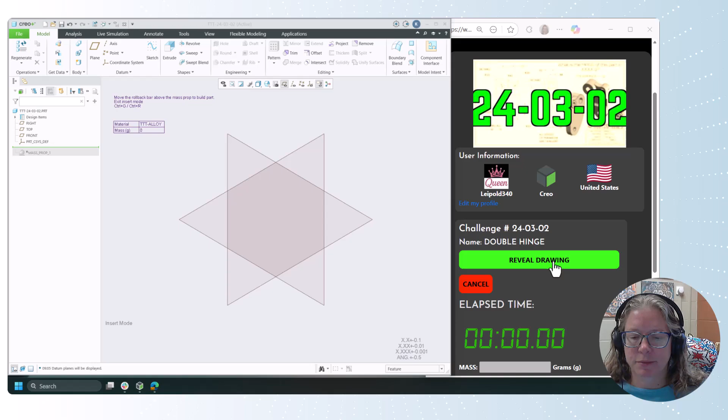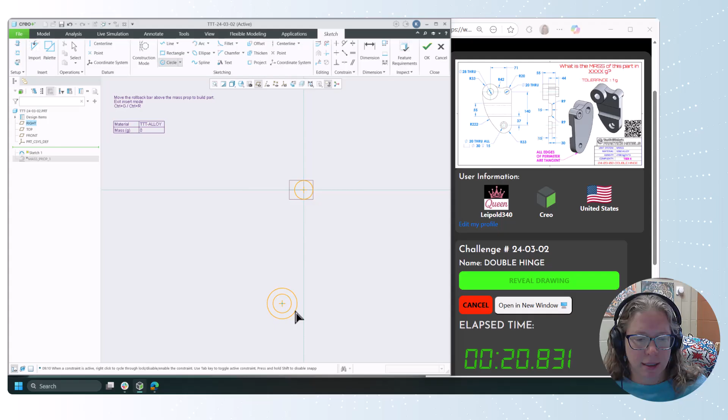So here we go. We're going to make a sketch on the front plane and try to capture a lot of this information in here. We're going to do a circle. Sometimes I like to double click and type in a new value and just kind of rescale the whole thing before I go too much further. The hole down here is also 20 on the inside, so we can do that. And then add a few other circles for the counterbore and the radius.

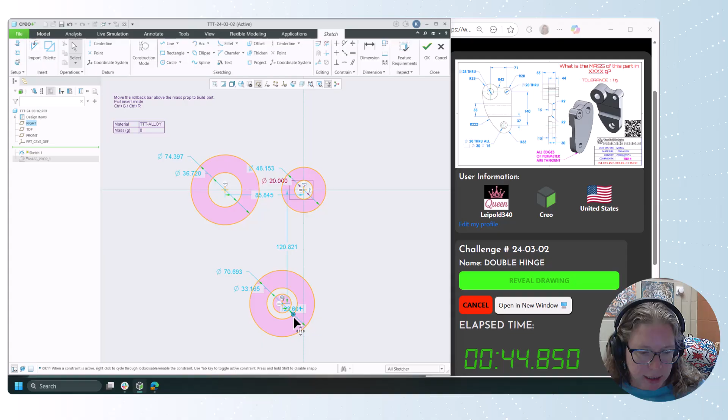We'll add one over here for the radius. We'll add one straight over, but I don't want this one to be the same size. So if I hold down Shift, it gets rid of those equal size constraints so I can place it individually. Okay. All right, so let's see here. I know this one's going to be 140.

We've got the inside diameter 20, which is up here. Let's start up at the top. Let's make that a radius of 20. Let's make the inside diameter over here 28 and the outside a radius of 33. There we go. The distance between those two is going to be 71. Okay. All right, so we got the distance.

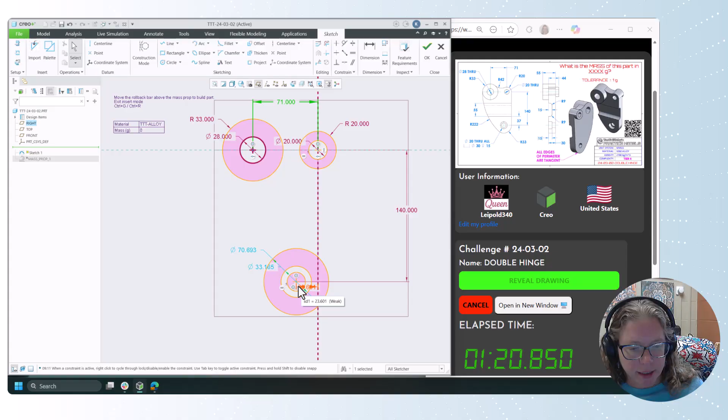Center is 20, its counterbore is 30, and the radius out there, oh, I guess I could have made those the same. Oh well, it's 33. All right, we're going to add a line that's coming down vertically from the top hole. Right, and then let's make this tangent.

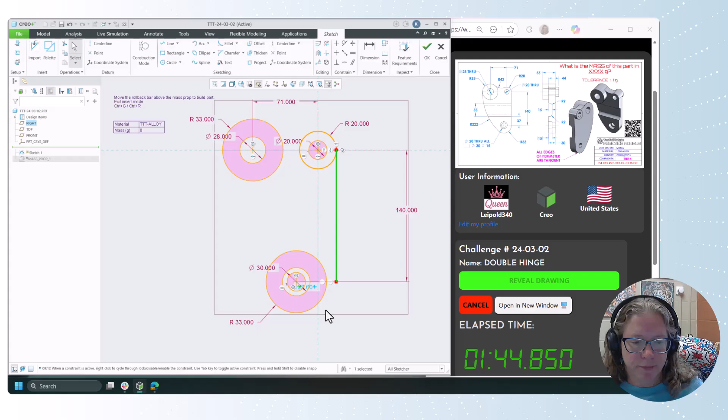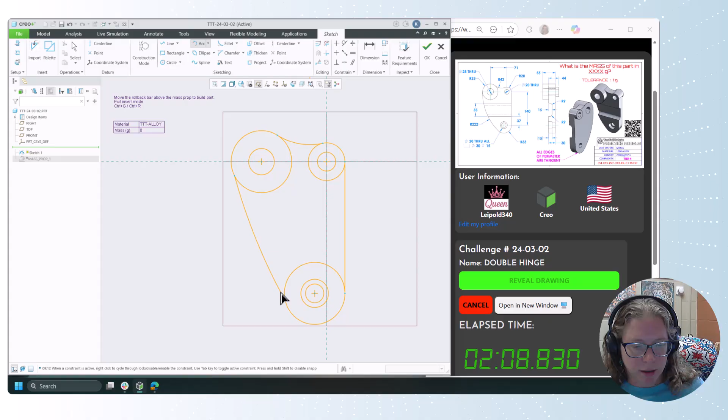Okay. Next, we got two arcs that are tangent arcs, so we can start here and end here, and I want it to be tangent. We can get one of them, we can't get both of them, but I can hold down Control, get both of them, and make them tangent right there. Same thing here. I'm going to make a tangent arc. I want one of those tangent constraints, but I can hold Control and get the second one.

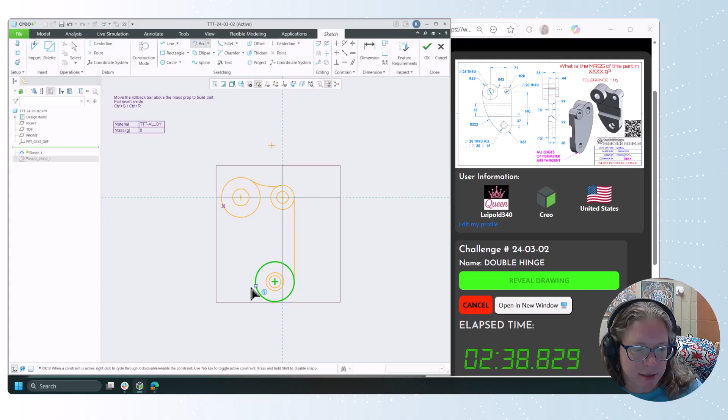All right, this radius is 222. Oh, and it's going the wrong way. Hold on. I might have an issue with that. I don't know if it'll let me force it the other direction. Yep. So let's get rid of that arc and try that one again. So my mistake there, we're going to make this arc on the outside tangent. There we go.

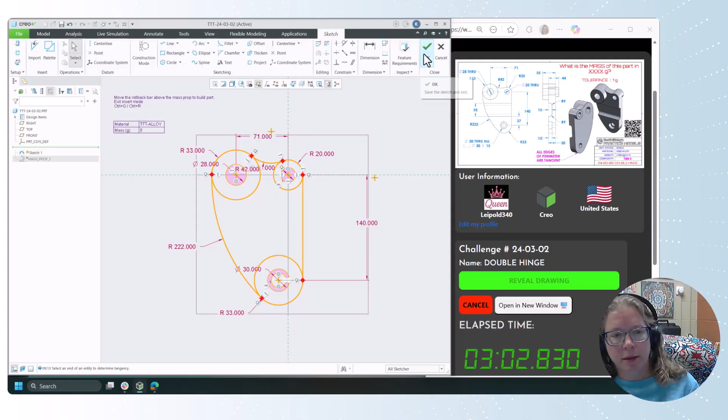And this radius here is 42. And I think we're pretty good here from all of our dimensions. All right. So using sketch regions, let's turn that off. Let's Shift S for sketch regions. Let's extrude that one. That one's got a height of 55.

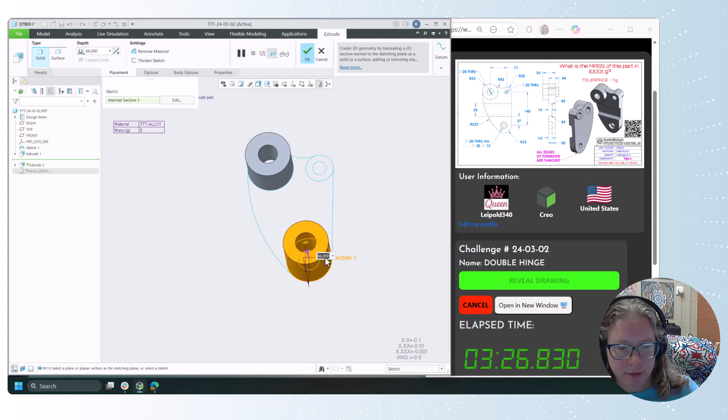Let's extrude this one. We got a height here of 30. Let's extrude this one. One of my little fun hacks is as you grab to drag this, you can hold down Shift and get a surface so it'll stick to that. But then I can right click and say side 2 depth is variable, and we'll set that as 44 minus 30. Okay, so we come down 44 from the top.

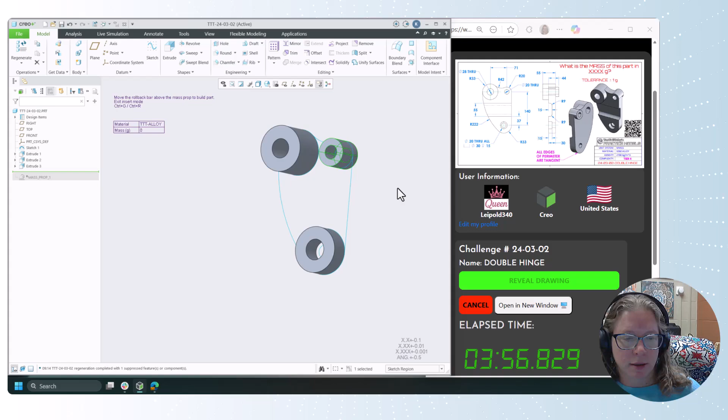Now we'll extrude this part. And again, we'll take that Shift and drag it down to the surface.

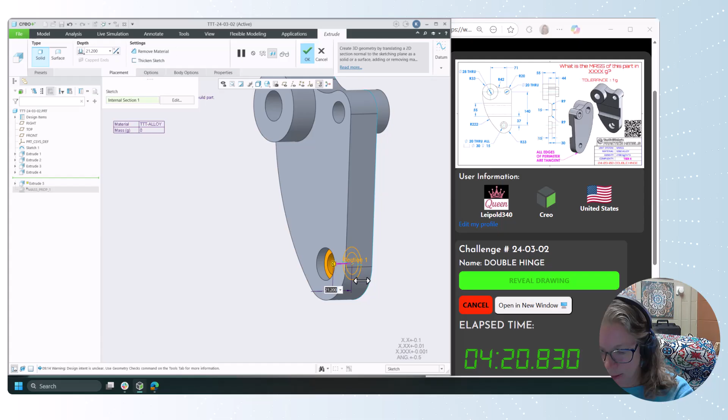All right. As far as sketches, I'm also going to take this part and extrude that up. And we'll make the distance, it's going to be down 15, which means it's going to come up 30 minus 15. Interesting. I think that's okay. All right.

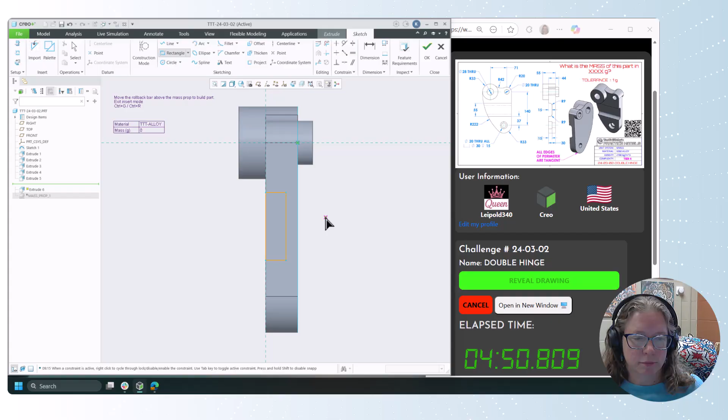So the last thing we'll do is add this notch cutout. So if I hit extrude here, I don't need to do sketch regions. But what happens, I want to add a fillet to those bottom two corners, set that distance to 9, overall width of 55, depth of 15.

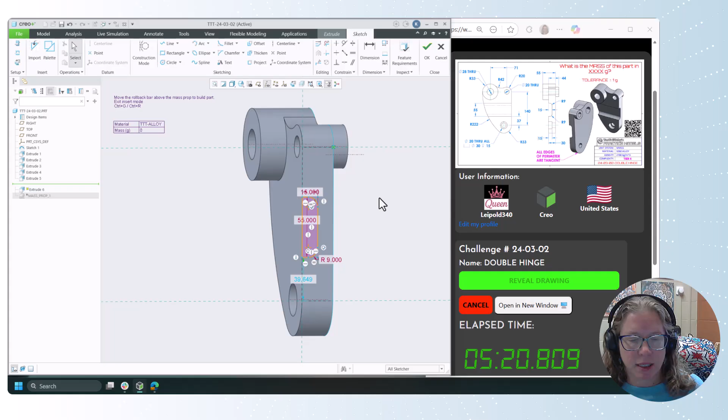Right, and I'm not dimensioning it from here, I'm dimensioning it from the hole over here. So I'm going to turn on axes, and I'm going to make that axis a reference so I can dimension from it. Actually, when I did that, it already added the number in for me. Perfect. So I was able to select that axis pretty easy, and that's great. But to be honest, when I first started it, it wouldn't let me because I didn't have an axis. So let's talk about that in just a second.

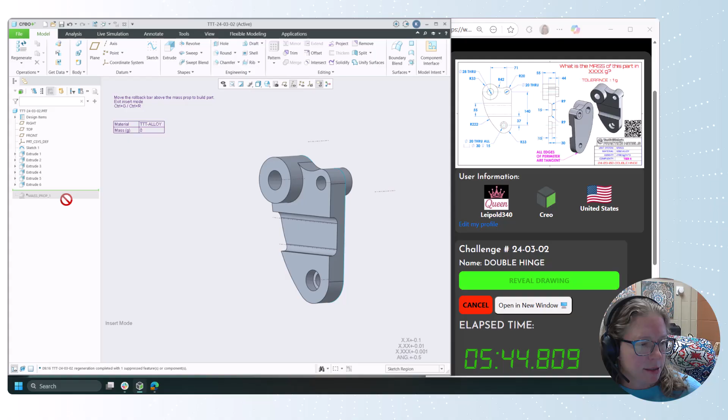And we're going to type in 1480. There we go. All right. So awesome. Definitely shaved a little time off there. But let's talk about these axes that are showing up. So normally we have an axis that shows up when we click on or extrude a circle. It has to be a full circle. If it's not a full circle, we don't get an axis from that extrusion.

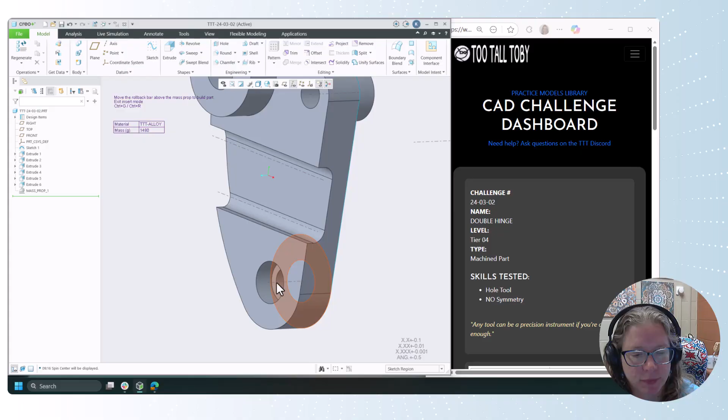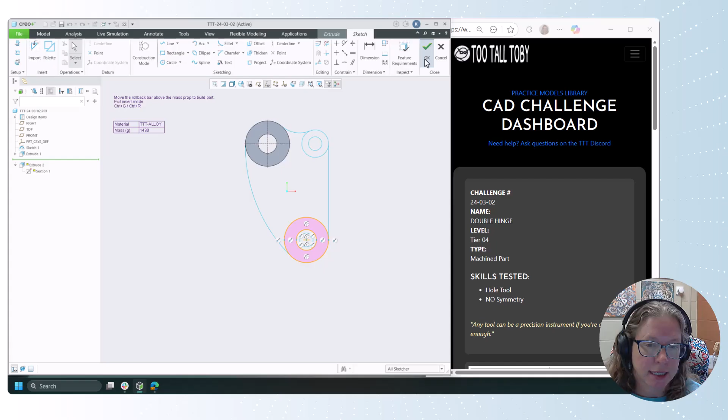So what happened here is because I was making these with a sketch region, let's go to that second extrude and edit definition and see what that sketch really looks like. So this is not two circles. This is a projection of it. It's an arc that we get from projecting the first sketch. So that's how sketch regions functions. It takes an existing sketch and creates a projection of those bounding areas. So because this is recognized as an arc and not circles, if you leave the default configuration settings, when you extrude that, you don't get axes because they're not circles, they're arcs.

So there is a setting that allows you to add axes to arcs, but the trade-off then is that this arc down here gets a center line. This arc gets a center line. This arc gets a center line. So if you don't want all of it, it's a trade-off, right? Do you want to have to add axes to your circles? Do you want to go back and natively sketch with extrudes instead of sketch regions? Or do you want to have more axes showing up than you actually need? That's kind of your challenge.

So it's under File, Options, and in the upper corner you can type in axes, not axis. So you do need to have the plural for it to show up all the information. I'll show you if you type in axis. You don't get all the same options. It really only shows you the options for axis, not axes.

Anyway, so I have a configuration that is in my UI called Show Axes for extruded arcs. And I have that set to yes. The default on this one is no, so that you don't get the axes through every extruded arc. But I've grown to love sketch regions, so I have turned yes on for my show axes for extruded arcs. The downside will be more axes than I need sometimes, but for right now, I think this is an appropriate setting. Okay.